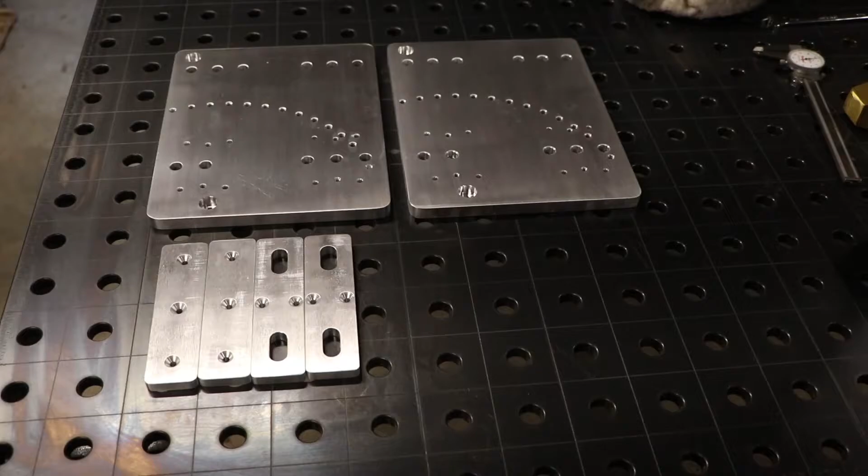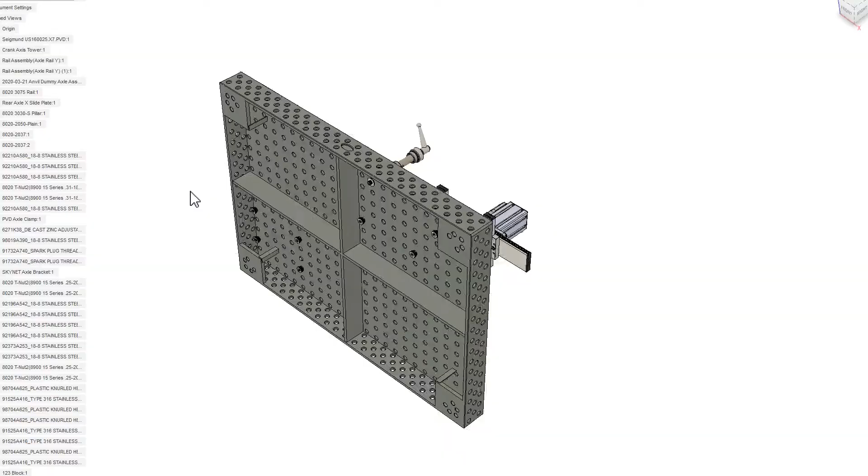So it is time to actually start building the SKYNET fixture. We're going to start off, I want to show you the model real quick here on Fusion 360. Basically what we're going to build today are these angle plates and then some of the other plates

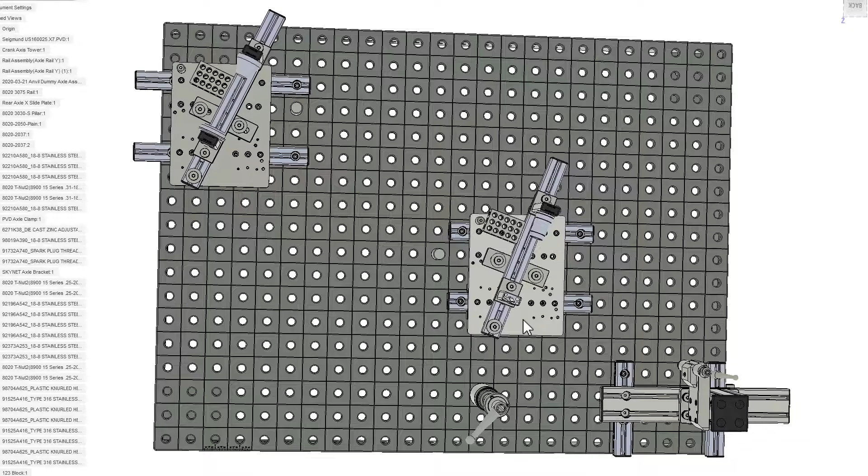that go underneath it. One of the very clever things about this design is the fact that these angle plates for the head tube and the seat tube are both the same thing, which makes it much simpler for us. If I hide the welding table here and zoom in just a little bit, you can see it's basically just a plate with all these holes that we have to drill.

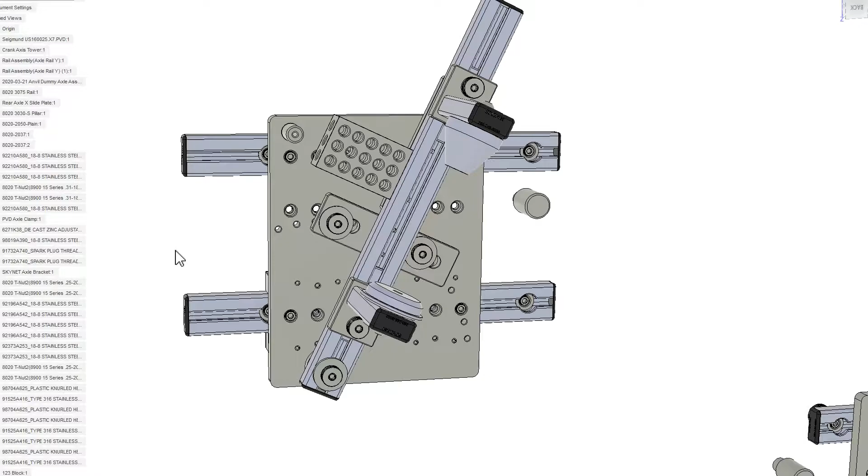And really, in my opinion, this is probably the most complicated part of the machining. Well, maybe not necessarily complicated, but just time consuming because there's so many holes. And then we're also going to make these right here that go underneath it. And on the back of it, we're going to drill the holes that mount these slides.

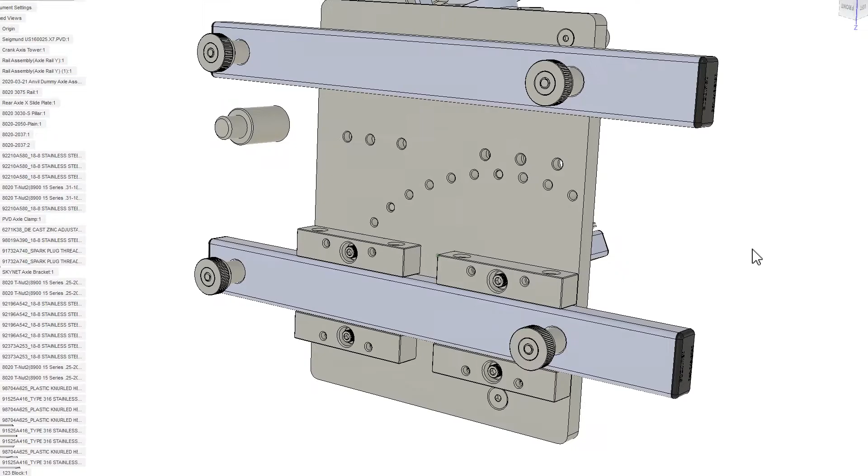Now for these, I'm going to talk more about those later as we make them, what their purpose is and all that good stuff, because there's some more clever stuff going on there. But let's go ahead and jump over to the drawings first, where it might be a little bit more clear what we're doing. This should give you a better idea of what we're making here, and I'll point out some of the important things to look out for while we make the angle plates.

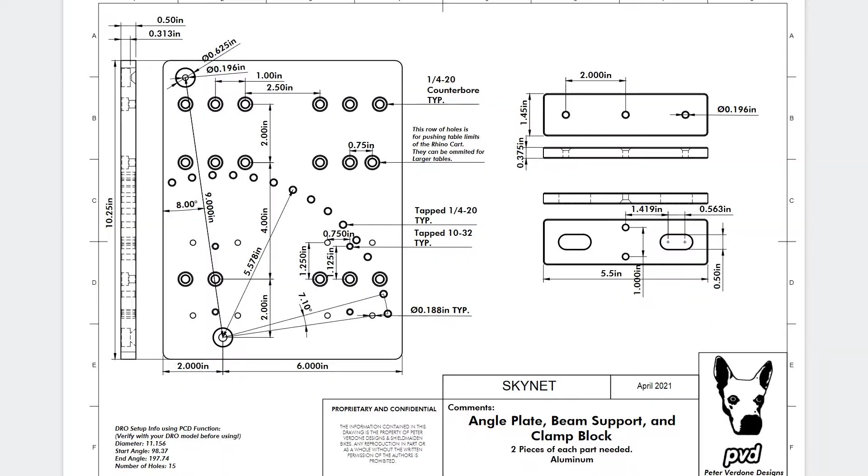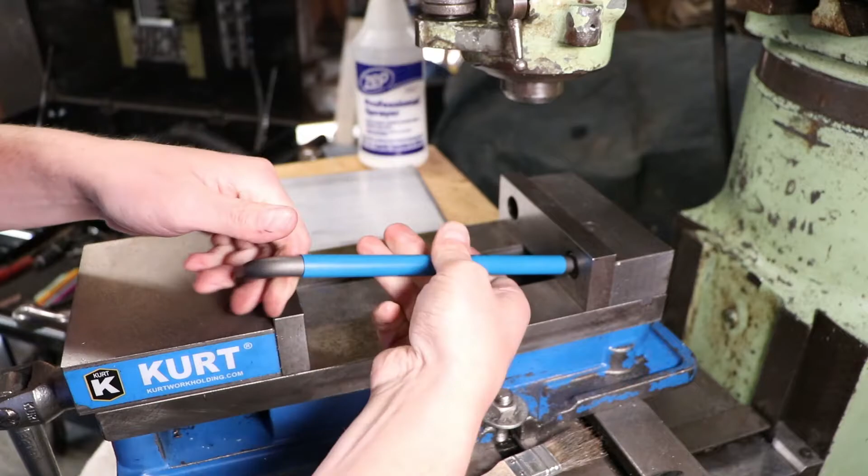So now out here in the shop, one of the first problems we run into is this 8-inch plate does not fit inside a 6-inch Kurt vise. So I did it the easy way: I just took the jaw off real quick and used the vise body itself to mount to. Quick and dirty, and it works in this case just fine. So I'll put it up on some parallels and then get it clamped down nice and tight.

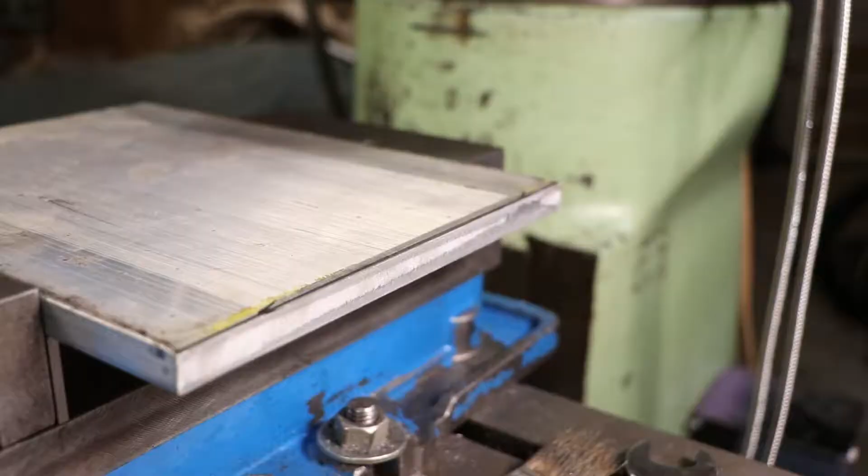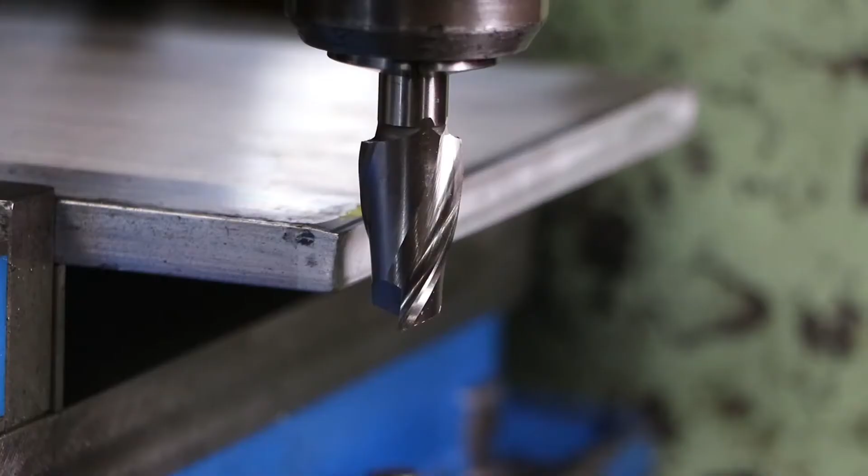One of the first things we have to take care of, if you see there, the edge of this plate, straight from the guy I got it from, is sheared, or is it shorn in this case? I don't know. But we need to get that cleaned up so we can make it look nice and pretty. So I just put a basic 3/4-inch end mill in there, dialed it in and faced it off just a bit.

So you can see here I'm just finding the edge, touching off basically. And then I come back just a bit, dial in, I don't know exactly how much, maybe 20-30 thousandths, and then just went ahead and took the whole side off. And we'll go into fast forward here.

And then once that was faced off, I was able to go ahead and zero out my DRO for that side, and then travel the 10 1/4 inches we need, plus the diameter of the end mill, face the other side, and then I know this plate is exactly 10 1/4 long. And then all that's left is to put in an edge finder and pick up the other edge so I'll know where I'm at on the plate.

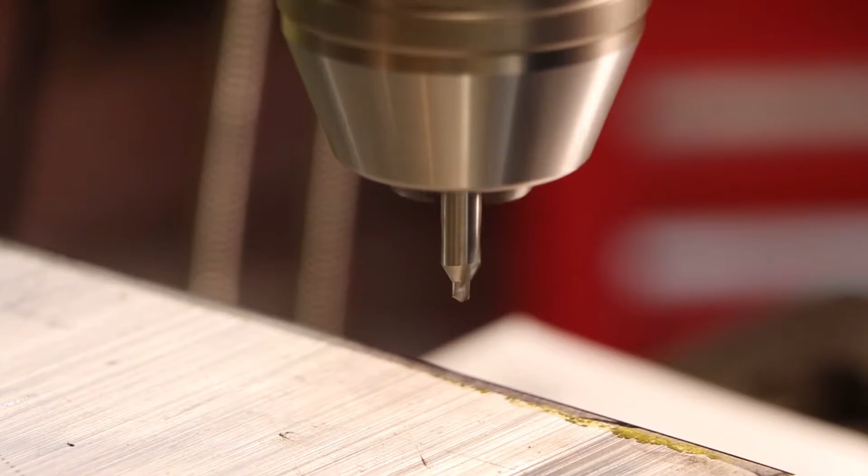And here I'm just making sure there wasn't any big burr or anything like that on the edge for using the edge finder. So we come in, grab the edge right there, right when it kicks. And then it's just a matter of basically just putting all the holes in the right place.

So I knew where the edge of the plate was, so I came into where I want the pivot to be, which I ended up considering the origin in this case. And then I moved over to the other side and made that one. And yeah, it's just a matter of getting all the holes in the right spot.

And I will say it really helps to make good use of the digital readout, because basically all digital readouts will have an absolute and incremental function. So essentially you can switch between as many coordinate systems as you want while still maintaining your, we'll call it absolute zero at the origin. And so here we're going to go ahead and talk about the PCD function of the digital readout.

So I'm going to pause for just a second, and basically if your digital readout looks like mine, like the numbers are the same, then that means it is the same regardless of brand. Because all of these that you can find for cheap online, they're made in the same factory somewhere in China or whatever, and they just throw a different brand name on there. But basically you just push that button for the PCD function, then we put in all of our information.

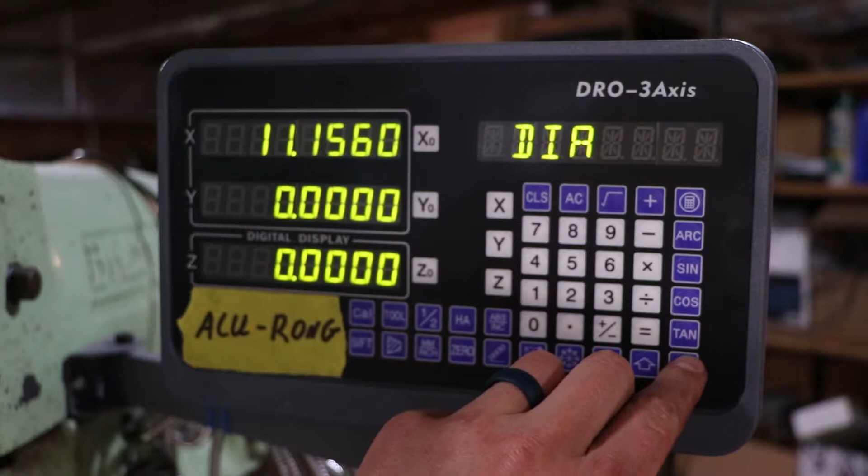So it starts off by asking you basically what coordinate system you're going to use. In this case we want the X and the Y axis. And then the center position is another one, and basically that's asking where we want the center to be. So in this case, that pivot was our origin, so 0, 0. And then it's asking us for the diameter, which is already in there. It's 11.156. I'm not sure I typed it in again or not. Yeah, I did. And then the next thing it's going to ask us is the start angle.

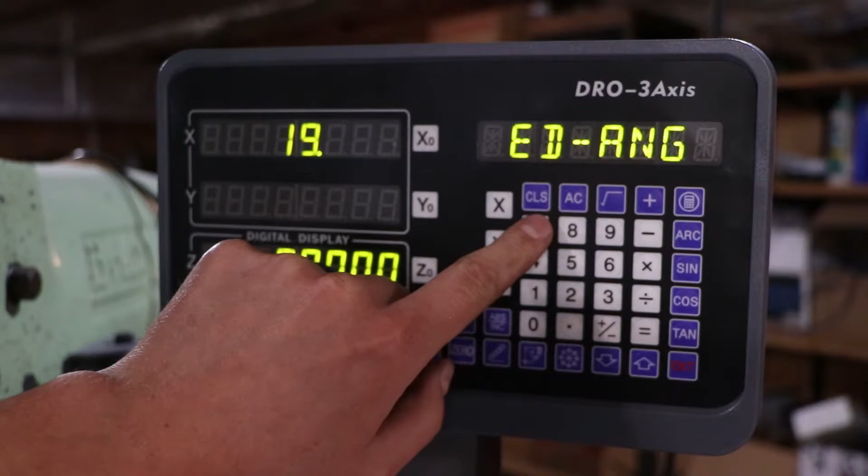And it's a little weird the way these work, but basically if your digital readout is different or this doesn't work, just read the manual. I mean, yes, they're translated horribly and hard to read, but it's in the manual. So the start angle in this case was, there we go, 98.370. And then the ending angle was 197.74. And then it asked us the number of holes, which is 15 in this case.

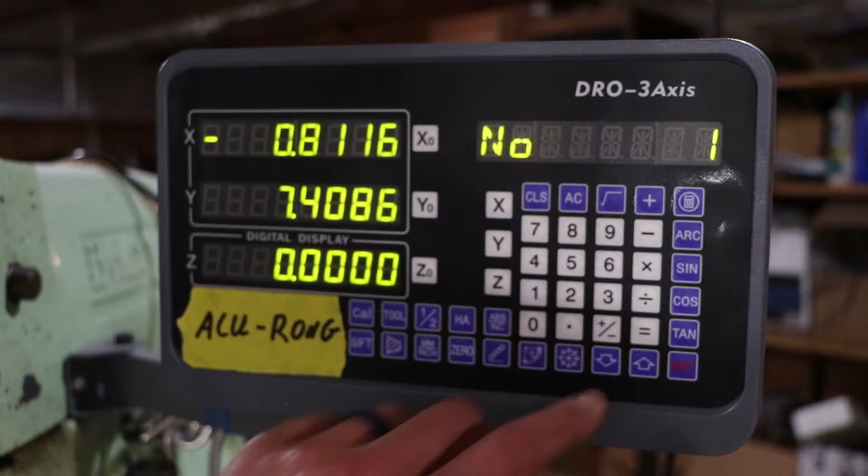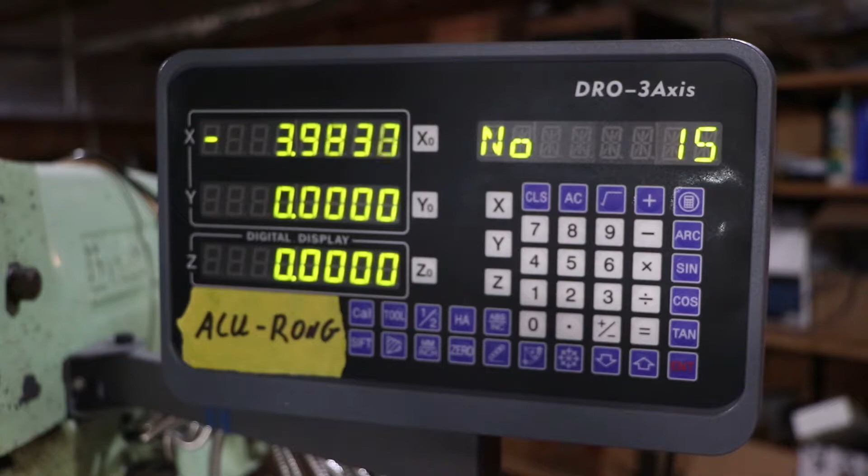And then just like that, it spits out each hole for us. So basically it gives us 1 through 15 that we can use the arrow keys to go up and down to. And then all we have to do is make the X and Y axis go to 0 for each hole. So you'll see here I dial in the first hole. Basically we just zero both out and then we're in the right position. And after we drill that hole, we hit the up arrow or the down arrow to go to the next hole and then do the same thing again.

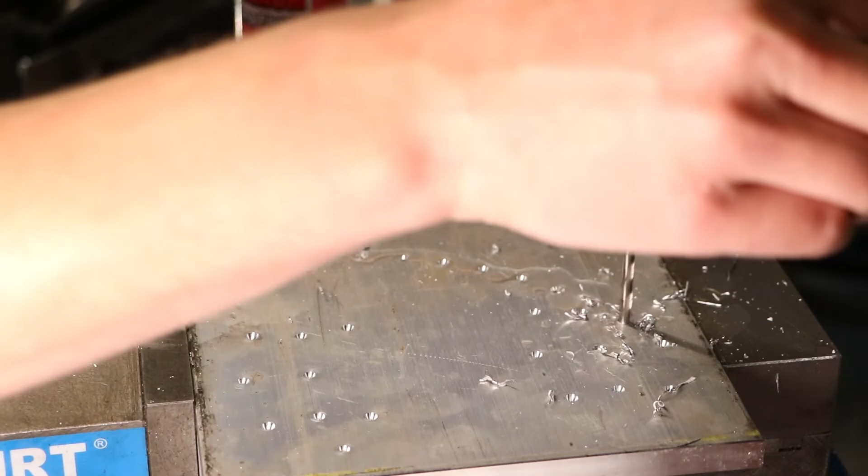And I actually tapped them first and then came back through and countersunk them, which is no big deal because I used a tap follower to get the tap started. But you're supposed to do a little countersink, chamfer the hole before you tap it. It's just better that way. But for doing this, it's real simple.

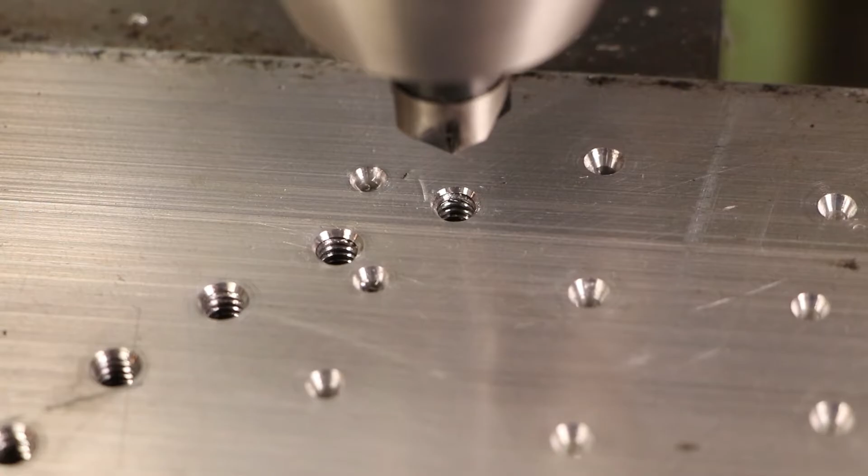We basically just set a stop on the quill so they all look the same and dial that into where we want it, and then again we just go through each hole using the same function on the DRO. While we've got it pulled up on there, we just stick with it and do each hole, and then they all come out looking really nice and even, and it looks like we actually know what we're doing. So there you go, nice little pretty shot of all the holes.

And so for the next step here, again, it's basically just making all the holes where they need to go. So here I'm drilling, I already forgot exactly what size this was, but this is the size drill that I needed for the counterbore that I have. Basically just matches the pilot size. And so we just go through each one and put them where they need to be.

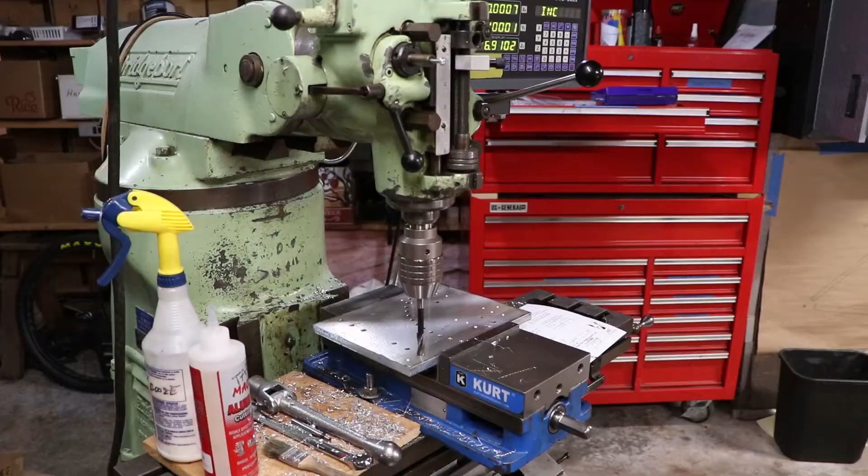And then next up, I went ahead and counterbored these. And so I'll show you how I set that up. I did a really quick and dirty way of doing it, where when we go up to the quill of the machine, we set our stop basically just using the fastener itself. I set the counterbore down on the plate, and I used the fastener itself to set my gap there on the travel. And of course I started it in the wrong direction. Had to put it in low speed.

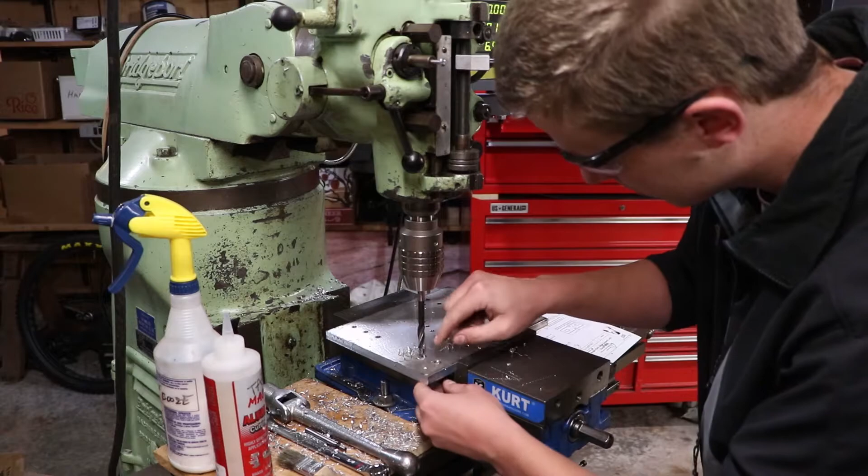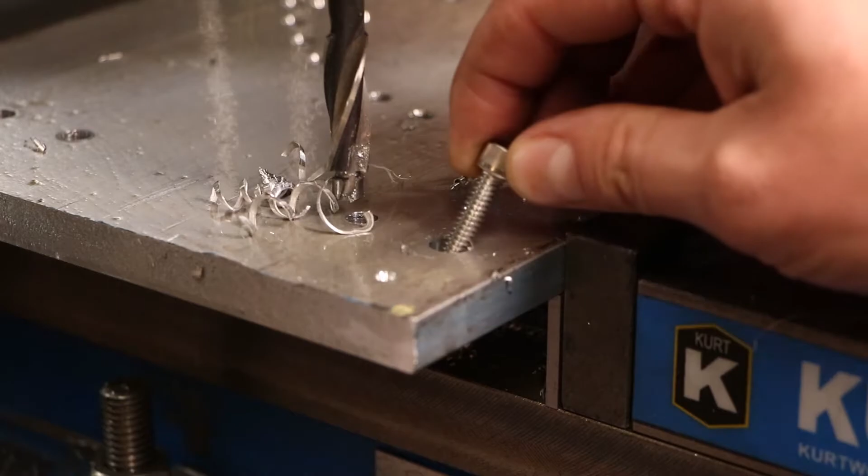But then we go ahead and try it out. So we do one hole here, bore it down all the way until we hit the stop. Pull it out, and then we check it with the fastener. And in this case it worked out good, because this is not a critical dimension; all we're looking for is to make sure the head of the fastener is slightly below the surface. Too much obviously is bad, but too little and it sticks out. So here we go, close up. Just put it in there, try it out, and yep, fits good.

And so then here was drilling out some of the other holes. That was for the 10-32 fasteners that we use. And I want to show you this part. Check out this tap. If you've never seen one of these before, these are awesome. If you notice that cut on the tip, it's designed to push the chip out of the bottom of the hole. So for a through hole, it's perfect.

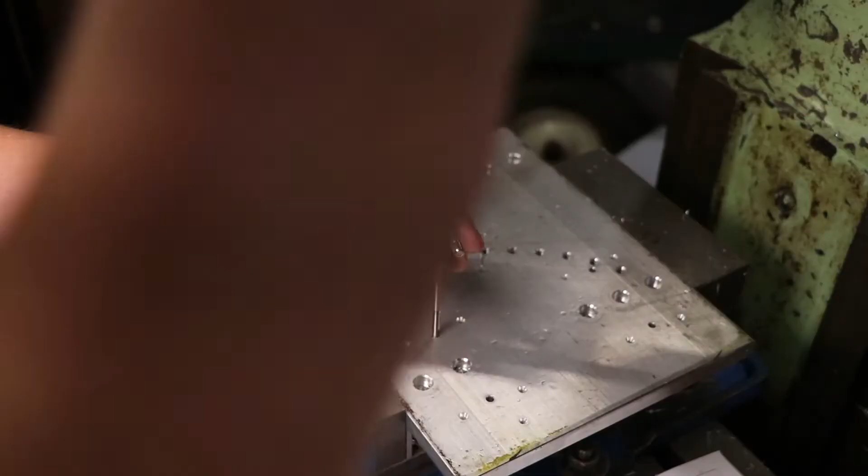And so once you get it started, you can just crank it on in there. The way your grandpa showed you, where you go forward a half turn then back a quarter, you don't have to worry about that. And these are nice sharp taps, so you can feel it. It just sails right through. You just screw it all the way in and all the way back out, and that's it. And you can power these, but I don't have a tapping head, so I just crank it in by hand.

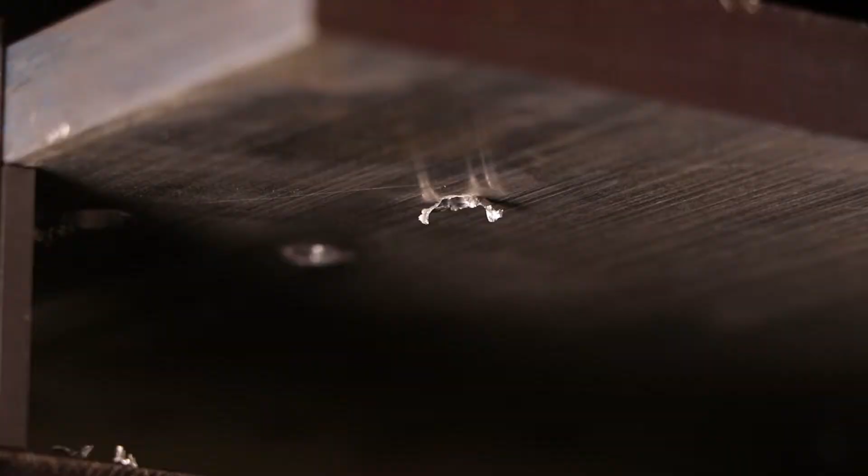Now, this next shot here is really cool. This is the bottom side of one of those holes as I tap it. And check out that chip as it comes out. Just screwing it in by hand, just like in the first shot, and that chip just comes all the way out in one long form, just like that. I thought that was pretty fun to watch from this angle. And there it is.

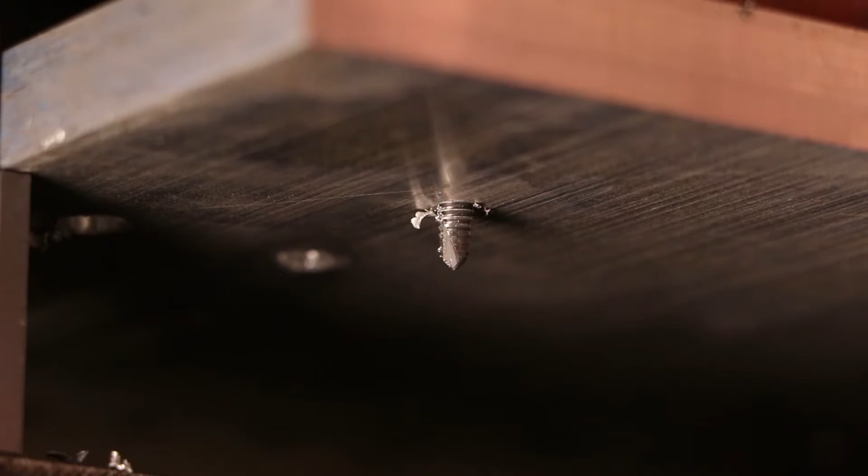So I'm actually jumping around a bit, because this is the order that I did it. I didn't have an end mill that I needed; I was waiting for it to be delivered. So I jumped over to the other plates that we have to make, the beam support and then the clamp block. So I faced them to length, because the length was not a very critical dimension. I just got it as close as we needed. Centered up on it with an edge finder again, and then we just poke the holes where they need to be.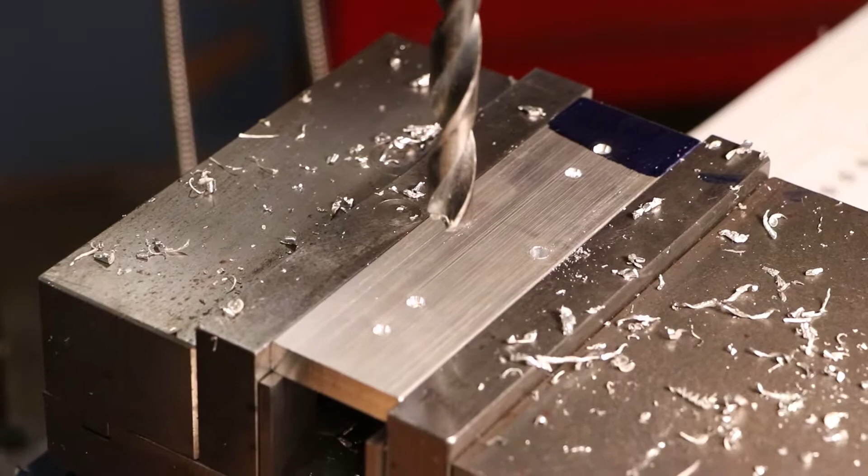Now I'm skipping ahead again. These are the slots that we need to create. I did it the quick and dirty way. Basically I just took a drill bit slightly smaller than the size that we need and drilled out the center of each end of the slot. I've got that marked out on the drawings. That got most of the material out of the way. Then I took a nice dull scrap 2-flute end mill of the right size, in this case 1/2 inch. And then we just plunge it down in there.

Then we get it all the way through, we lock the quill in place, and then we just slowly travel over. Now again, this is the quick and dirty way. If you want a precise slot, this is definitely not the right way to do it. They did come out just fine though, and for our case, this is perfectly acceptable. But if you want a super precise width on your slot, this is definitely not the best way of going about it. I'll show you a close-up in just a second. It came out fine.

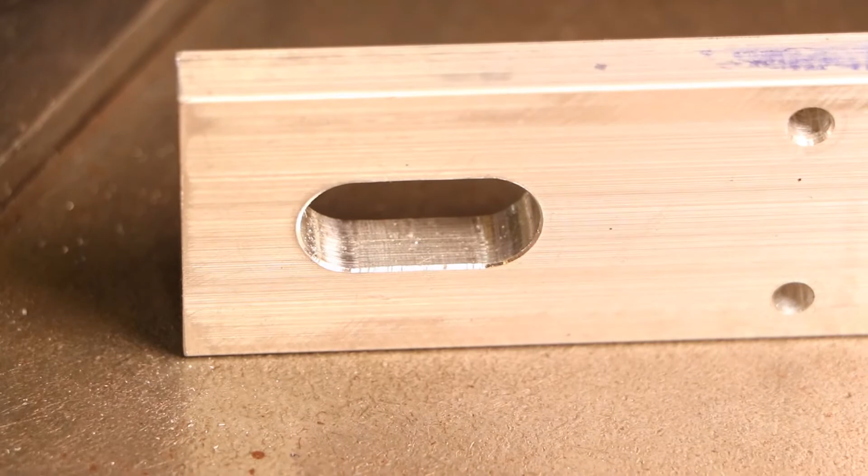And there you go. You see the finish on the inside of that. It's going to be perfect for what we're doing. Now there was one side, you can see one of the problems here. That right there, I believe, is from the end mill recutting some of the chips. But I just took a file to it and they came right off, no problem.

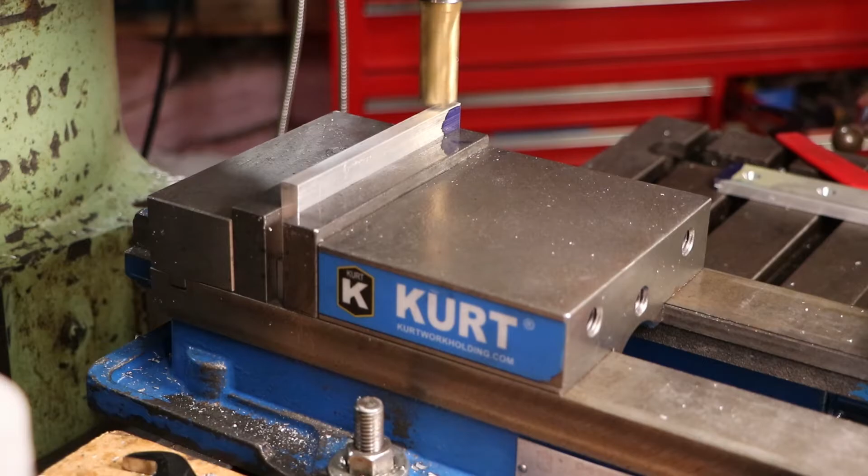And now one more thing, for the beam support blocks, this is 1.5 inch bar stock aluminum, but it needs to be slightly less than 1.5 inches. The purpose for that is so when it's supporting the rail that's actually holding the head tube, it needs to be slightly thinner than the extrusion.

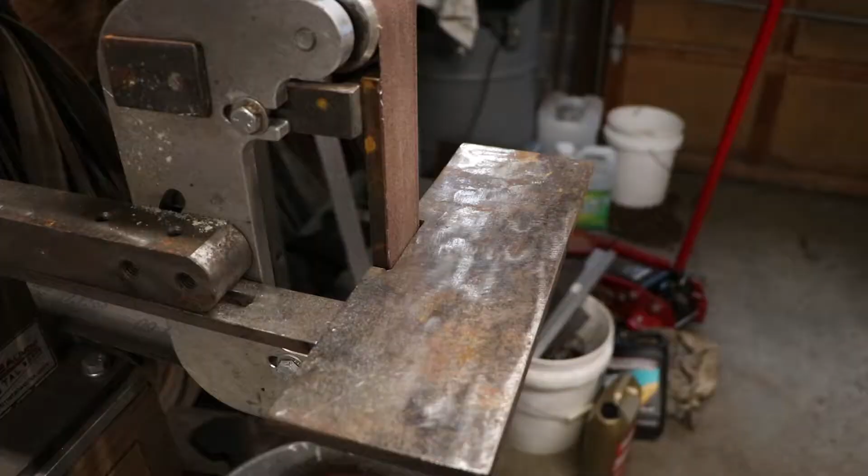Then came over to the belt sander here and basically just making it look pretty. So I went ahead and just knocked these corners off, rounded them a little bit, make them nicer. Nothing too complicated there. I just did that to all 4 corners on both plates.

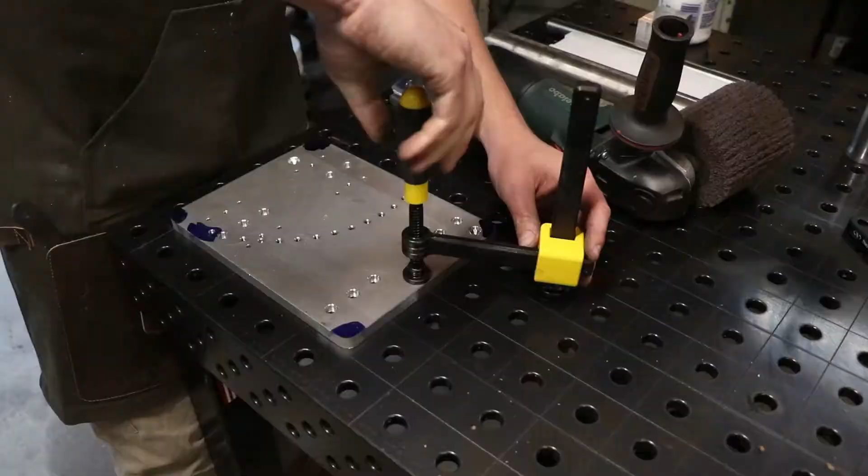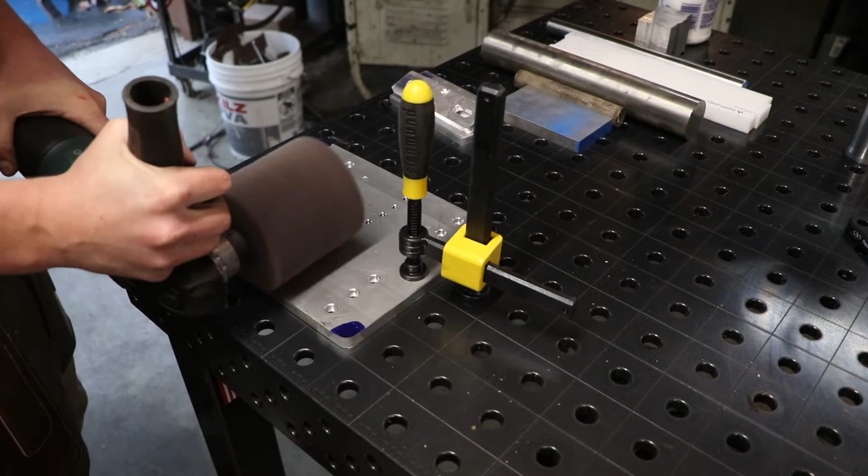Now this is a smoke 'em if you got 'em sort of thing, but I've got this burnishing tool from some work I've done in the past, and it makes really quick work of making these plates pretty. It's dirty and messy, so I got the door open, but you'll see how fast it is. It's basically just a Scotch-Brite wheel, and you can see right there, it just hitches them up. It takes 30 seconds.

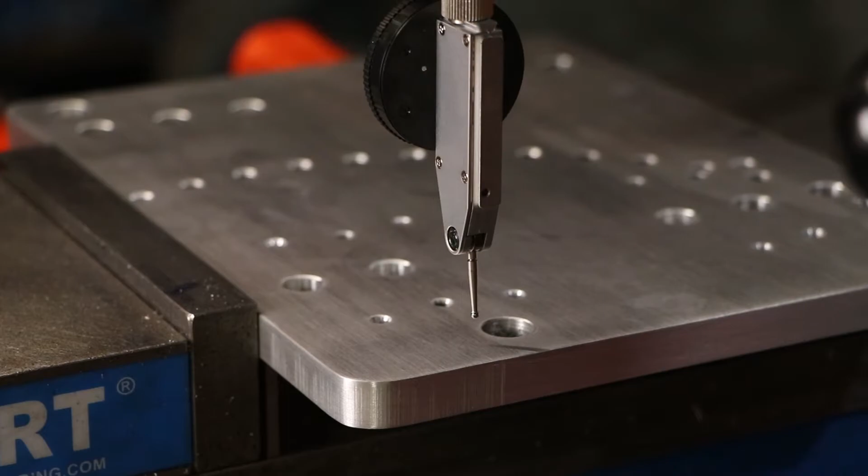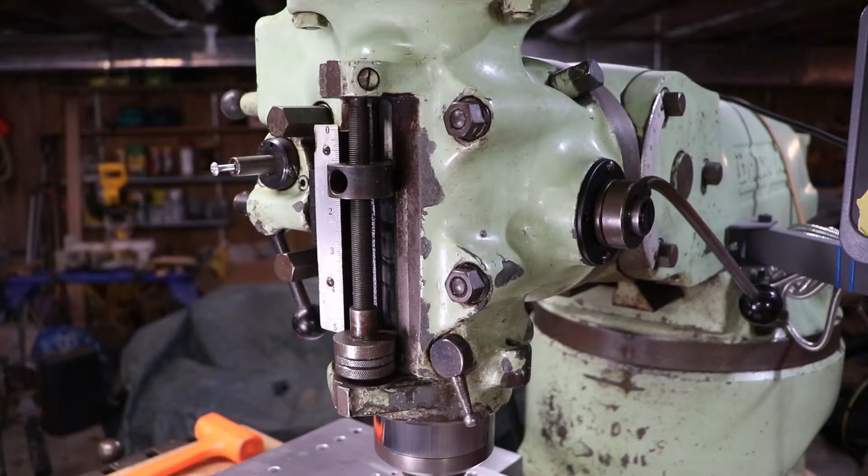So now jumping back, I didn't have the end mill that I needed for this boring operation. Ideally, you would have done this while you still had it in the vise. So in the interest of just getting these parts done, I came back and did it last. I just got an indicator in there, indicating back in on the hole so I know exactly where it needs to be. Nothing too complicated there. I think you can see a little bit. See, we're getting closer. But I got it dialed in, and then we did this boring operation.

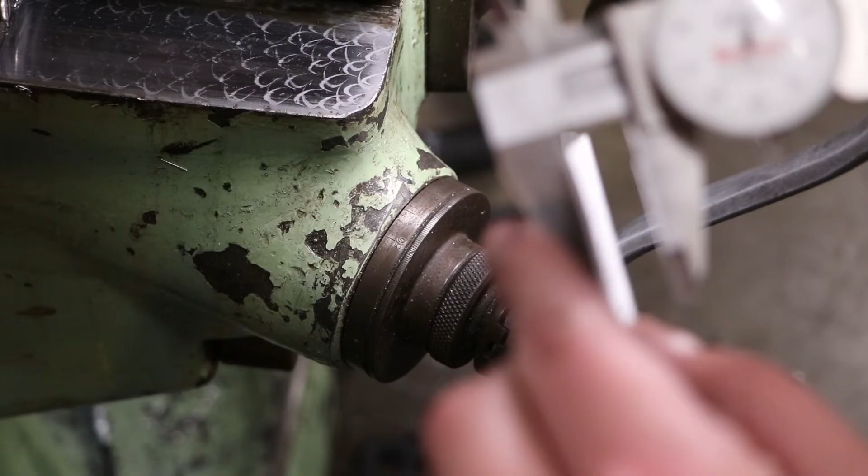This was a technique that PVD also told me about, but basically we're going to use the power feed to bore it. So first thing is I set up my stop on the quill nice and solid all the way down, then lock it. And then we're using the knee here and a piece of paper to basically feel the surface. You can see right about there, and you can kind of hear it. When the paper grabs, we know we're almost there. In fact, the paper is about 5.5 thousandths. It's pretty thick paper. So now when we bring the knee up another 5 thousandths, the edge of our end mill is exactly at the top of the plate.

So I went ahead and brought it up 5, and then I dialed in the depth that we need, which in this case was, I believe, 313 thousandths. So you'll see here, it's just 3 rotations, then plus another 13. And so the whole idea of this is that we're going to center back up over the hole. I'm going to hit the power feed on the mill, and it's going to go down exactly 313 thousandths, give or take, and then stop automatically. And we'll see, it worked out awesome.

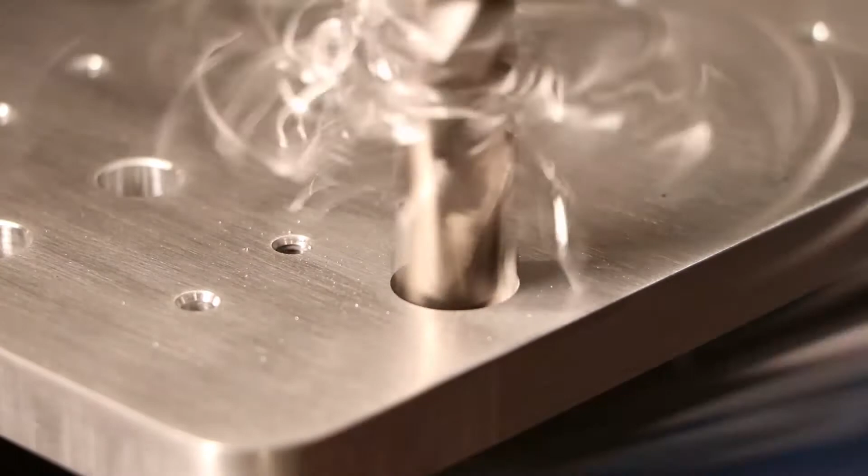So check this out. I start it up, pull the power feed, and then it just runs down in there, nice and quick and easy, and here it goes. And once it hits the stop, we go ahead and stop the machine, hit the brake, and then we pull it up out of there. And look at that finish too. It turned out awesome. So you can see there, beautiful finish, nice sharp end mill.

And then this part's for the haters. I don't have a depth micrometer. I need to get one, but I used the calipers. But again, we're just going for close enough here. This is not a super critical dimension. But check that out. I was shooting for 313 thousandths on the print, and yeah, I'd say that's definitely good enough. And that pretty much covers it for these plates.

Again, we're going to talk a lot more about some of this stuff as we go along, but this is the basics of the angle plates and how I made them, and some of the stuff to look out for.

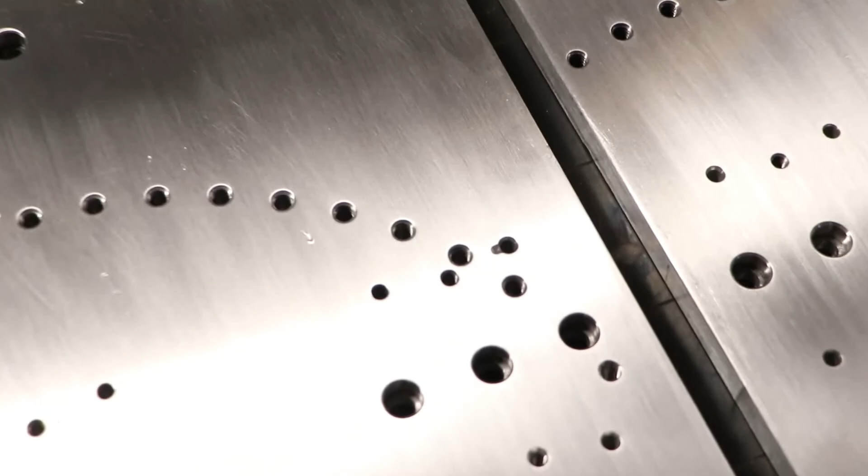Well, I had to have one little mistake in there, didn't I?